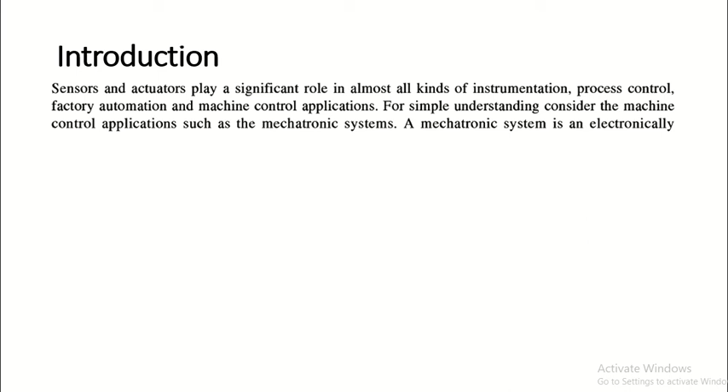Whatever the input received from the sensor, based on that, actuators are controlled with the help of a microcontroller or a central control unit. So almost everywhere, sensors and actuators are useful. For simple understanding, consider the machine control applications such as the mechatronic system. A mechatronic system is an electronically controlled mechanical machine.

Some example of mechatronic systems are robot, autonomous guided vehicles, cranes, numerical controlled machines, automobile engine, and tankers. In all these example of mechatronic system, we very well know that sensors play an important part. If we consider robots, they are successful in their working because of the sensory action. These sensors give input to the microcontrollers and then microcontrollers control the functioning of actuators. Similarly in autonomous guided vehicles and so on.

Micro mechatronic systems are mechatronic systems but their dimensions are measured in microscale level. Regardless of their dimension, all mechatronic systems are composed of four prime components. They are sensors, actuators, controllers, and mechanical components. So whenever we talk about mechatronic system, at any level, either it is micro level, nano level, or it is at general dimension, there are four basic components: sensor, actuators, controller, and some mechanical components.

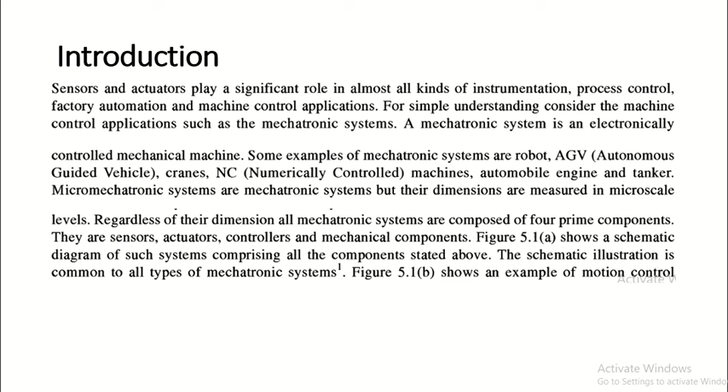So in the upcoming figure, I'll show a schematic diagram of the combination of all these components which comprises a complete mechatronic system. The plant could be an electrical motor. The meaning of load is simply the mass of the rotor along with the shaft which need to be rotated at a precise predefined speed. The output speed can be observed by using a feedback sensor.

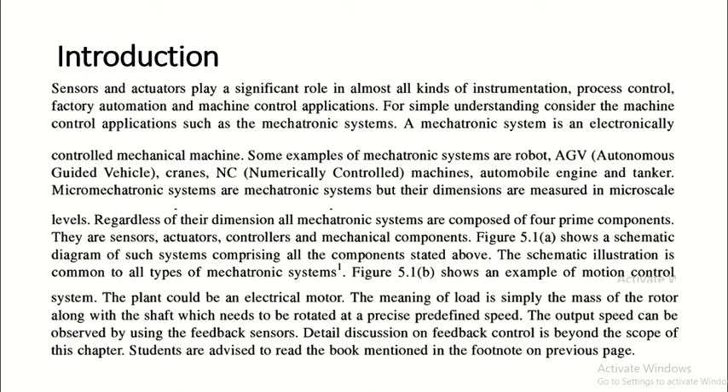So here one of the diagram is given, a schematic flowchart. Consider a plant. This plant can be any mechatronic system. It can be aircraft engine, it can be some defense equipment or some consumer based products like automated water purifiers, automated or smart TVs. So that is a type of a process. So here plant relates with a kind of a process.

So from that process, firstly sensors are connected which take inputs either from the environment or some of the process of that plant and give input to the microcontroller. So that microcontroller comes under the processing unit. It needs to be understood that the processing unit already has some kind of control algorithm, because of which the processing unit does a comparison between the measured value and the previously stored values, based upon which a decision is taken, and further that decision is transferred as a command signal to the mechanical component.

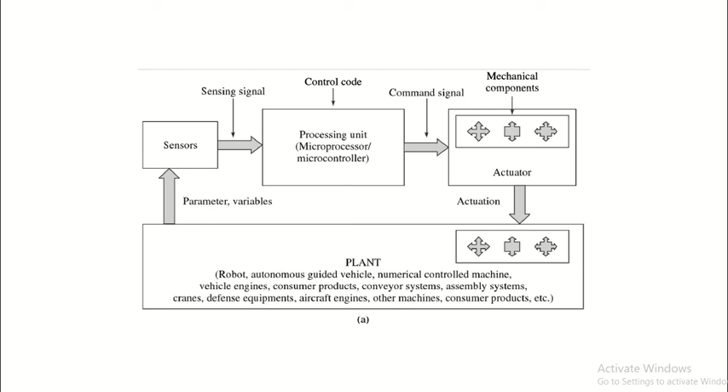Due to that mechanical component, it can be a linkage, it can be gears, or any mechanical component which produces a motion or some kind of actuation, and that actuation is further transferred to the plant, because of which the machines can move.

Now here another MEMS based example is given, where power unit is there, then power converter is there. It can be analog to digital converter or digital to analog converter. Then there is a plant, and finally a load. But here in this case, a feedback device is attached which controls the process and minimizes the error.

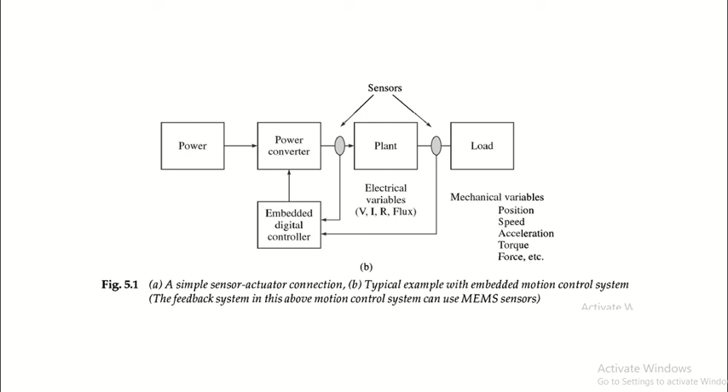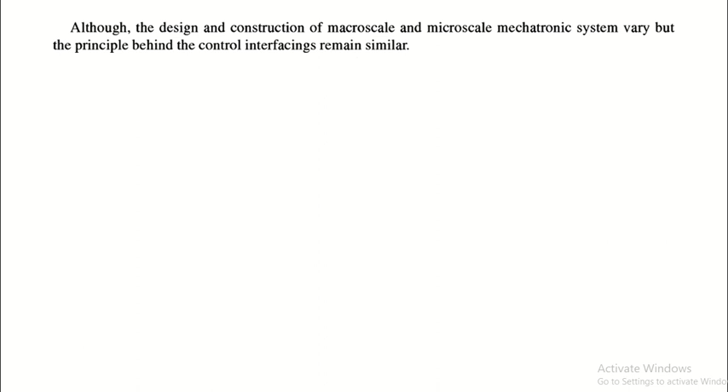Although the design and construction of macro scale and micro scale mechatronic systems vary, the principle behind the control interfacing remains similar. From control point of view, sensor will sense the signal and actuator will activate a control action. Depending upon the control requirements, sensors are chosen. The role of controller is to execute the control code for a given task.

In its abstract form, a simple but exemplar control code could be: drive the actuator from position 1 to position 2 when event n has occurred. So when we relate this simple control code with robotics, then we consider that a stepper motor will go from position 1 to position 2 when any kind of signal is transferred, or when sensor is going to sense a particular event, then it gives command to the actuator through the control unit that actuator will move from position 1 to position 2.

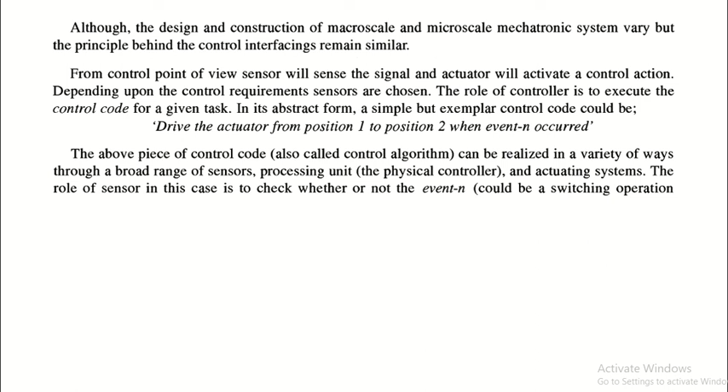The above piece of code is also known as control algorithm, which can be realized in a variety of ways through a broad range of sensors, processing units, and actuating systems. The role of sensor in this case is to check whether or not the event N has occurred. If yes, it passes the information to a controller. On receipt of this information, controller generates necessary driving signal in order to drive the actuator, so that the end effector of the actuator can move from one position to another.

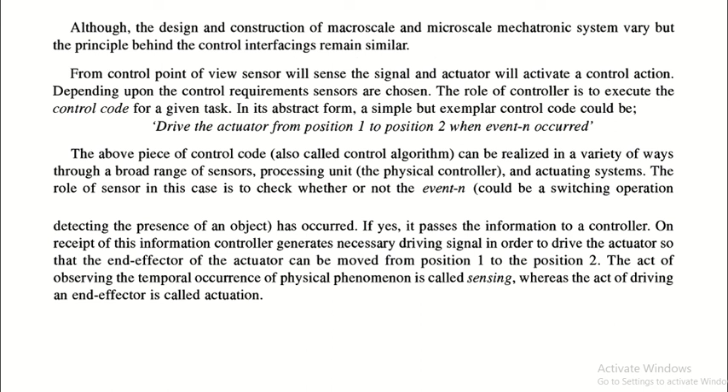The act of observing the temporal occurrence of physical phenomena is called sensing, whereas the act of driving an end effector is called actuation. So further in next lecture we'll understand more about the sensing.